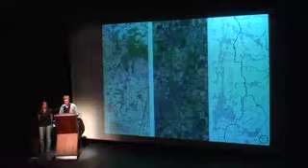So the question is, why is this water urbanism a hot topic today? It's been more or less forgotten for the past 2 centuries. Water was not considered in any urban theory, but now it's really becoming a hot topic.

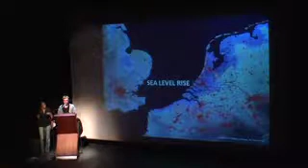And this because there are many challenges we are confronted with. The first one is related to climate change, which will lead to the rise of the sea level. So when we talk about sea level rise, we all have in mind the coast that might be affected, but actually in Flanders it's also the whole estuary of the Schelde. So this map in blue shows everything that is below 0 and 1.3 meters height. So according to some scenarios, that would be underwater within a certain future.

Another consequence of climate change is that the rainfall regime will change everywhere, but in Flanders it will lead to drier summers, wetter winters, and more intense extremes. It means that there will be more intense rainfalls in shorter periods of time.

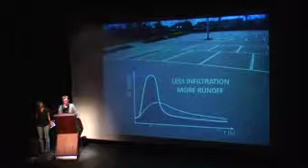So next to these natural factors, there's also the question of urbanization that is ongoing, and that leads to less infiltration and more runoff. It means that water can simply not infiltrate and goes more rapidly into the river. So this scheme is a kind of classic scheme in hydraulic science. The curve on the bottom is the normal reaction of a river in case of rain, and the one much more condensed is the reaction of a river if the environment is completely paved. It means that you have a peak flow, all water goes very rapidly into the river, and this is exactly what needs to be avoided and prevented.

And this topic of ongoing urbanization is also quite a hot topic, because Flanders is already now one of the most densely urbanized areas in the world, and for the next 15 years it will further increase. So in red you see predictions of where and how it will increase further.

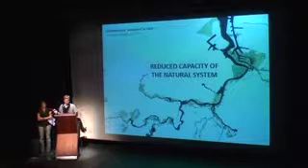Another factor is that the river system has been completely manipulated through time, and actually the capacity of the river system is completely reduced to a kind of minimum. This shows the winter bed of the Schelde estuary, so the maximum capacity between dikes of the Schelde, in comparison to the wetland at the time of Ferraris. So you see there, in a simple way, how the space for the water has been restricted. And this was a long-run process of the idea of controlling water, making it go away as fast as possible.

When you read all texts about these types of interventions they made, the idea was really, in case of storm, let's get rid of water as fast as possible. So rivers have been straightened, canalized, all meanders were cut off. This has been the logic for centuries and is now being a bit reconsidered.

So the result of all these factors is leading to what you see here. So a number of disasters which are happening more and more often, and also what is specific is that they are new disasters and that they are happening in unexpected places. So the water system appears more and more like very complex machinery that nobody really controls anymore.

So in reaction to this, there was a big effort to develop a new water management policy, and it could be considered as a small revolution. So in 2000, there was the European Water Framework Directive that is valid for the whole of Europe, and it was applied for Flanders into the Integraal Waterbeleid. So they're proposing lots of new ways to deal with water. But let's say that the two most important progresses are, first, that it takes as unit of water management no longer the administrative boundary of the municipality or a region, but really the physical boundary of the river system.

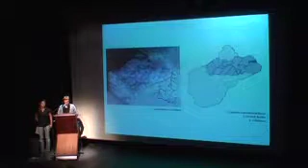So that was one major progress, and the other one is the shift from an end-of-pipe approach, where in the past we used to solve water problems in a very defensive way, like we protect this place, but we don't care about what happens downstream. So it is a totally new approach that now is much more preventive, saying let's keep water as much as possible where it is now.

So they defined and they are promoting what they call the three-step strategy. You can see here at the bottom. And it's the idea that you should at first make as much effort as possible to reuse, to let water infiltrate and retain it. And only once this is totally exploited, you can skip to the second strategy, which is storing excessive water. So once the water is in the river, to make sure it doesn't overflow, you can either make retention basins along the river or create some floodplains along the river.

And this is what they're actually doing now for the Sigma plan along the Schelde. They are recreating controlled floodplains, so kinds of pockets you see there with a new dike that can get flooded in case of high waters, and it keeps water for a moment and then goes back into the river. And then once these two first strategies are exploited, then you can drain water safely, make sure that the dikes are high enough, and if possible in a slow way. So if you can reconnect old meanders, it's better also.

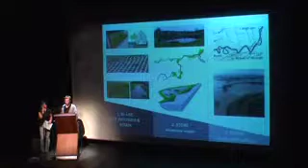So now we're gonna show the two case studies, and the word to Isabelle. So the first case study is the Gaverbeek in Harelbeke, Belgium. There are several strategies that you're going to recognize, but space for water and renaturalization is a main issue. So the Gaverbeek is located in the Leie Basin, and the motivation why I chose the case of the Gaverbeek Basin is because of this growing focus on retaining as much upstream. So it is an upstream area and non-navigable waterway.

And actually, so why do we do this? Because of this end-of-pipe solution that Christian was mentioning. In Ghent or in Bruges they are no more sustainable solutions, or are not seen as sustainable solutions. So that's why we go to the most upstream hydrological zone. And it talks about the smallest river in the river catchment, which is actually the first collector of rainfall, which could be seen as the first element that could be responsible for flooding downstream. So that is why we look at those.

These small rivers are today not really known by most of you, but the Gaverbeek Creek carries a lot of history and fame. The most known yearly event on this water course is the Waregem Koersen. It was and still is one of the known obstacles on the horse race track, as you can see here in some historical pictures. And further back in history, it was also the place where the Guldensporenslag took place. And today, for some of you soccer fans, it is the creek that lies next to the soccer stadium of Zulte Waregem. It runs also for more or less 8 kilometers under the E17 if you drive your car between Harelbeke and Waregem. So just to situate the creek.

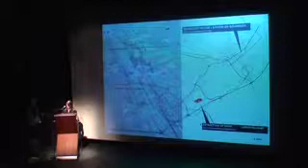And it was straightened, it was piped, even an extra exit pipe was put under Harelbeke to drain all the water as fast as possible to prevent flooding. So the decrease of the wetlands was caused by these landfills for the infrastructure. So the E17 was heightened up. Together with that came these big plots of industrial zones attached to it, also all landfilled. And of course big open spaces were also very attractive for new allotments.

So with less space for water, the challenge is now how to deal with the effects of climate change, or better, how to mitigate, how to soften these effects. So the recently flooded areas in red are caused now, today, by obstructions and sewer overflows. And the hydraulic devices, such as the sewers and dams, have reached their limits. Sewers cannot cope with it anymore. So with increased urbanization, the runoff will increase, and with climate change even more. So water needs more space.

So in this project, the challenge or the strategy is to renaturalize. So there were 3 landscapes identified on the basis of the scheme that Christian mentioned in the beginning: to retain water as much as possible in upstream areas, then to contain for reuse in the lower areas, where there are clay patches where you can store the water, and to drain, of course, where you need water resistance, or you can maybe adapt houses to be resilient, but you still need to drain a part.

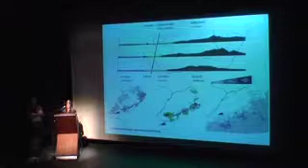So these 3 landscapes were characterized as part of a regional vision, and they were based on this water management principle. So the first area is the urbanized ladder edge, so between Harelbeke and Waregem there is to densify around the Steenwegen. Here the rainwater could be collected collectively around this road and brought to the lower wetland, where you then could de-densify the area.

In the second one, in the low wetlands, you could connect the meersen or marshes again in a chain, and the runoff of the infrastructure and industrial zones could be collected and purified in parallel basins that you see here, these lines. And the proposal here aims to integrate these water elements, infrastructure, and recreation in a kind of constructed wetland.

And then the third landscape is the diffuse edge, where water is retained upstream as much as possible, infiltrated through a remeandering of the course of these tributaries of the Gaverbeek. And here the urbanization is more spread, and you can see how these tributaries pass through, where they could again be uncovered and used in a renewed urban structure.

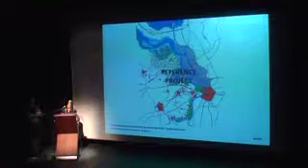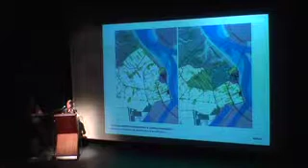So as a reference project to this strategy, I show Beveren, a project that OSA, our research group, made for a compensation area for the extension of the port. They also gave more space for water, and they defined 3 landscapes on a totally different scale, of course, than in our case study, but it's the same principle. It's about recognizing the renaturalization, the natural process of water in those areas, and defining a saltwater area, a brackish water area, and a sweetwater area. The urbanization is then restructured through densification and de-densification in relation to these 3 landscapes.

And this picture shows, for example, the former agricultural fields that are given back to nature in order to give space for water, and at the same time a new program emerges, recreation or a natural park. So the second issue, apart from the space for water, is a more urban issue, which is the creek village.

This example is situated in Vichte, one of the creek villages that I mentioned earlier, where remeandering and retaining water was the case. It's located on the creek, the Kasselrijbeek, and it is particular because of how these villages were settled. The origin was at a street that crossed the water, so they were located in this indigenous landscape with the castle and its moat, and then the farms situated next to the creek. And today this indigenous landscape has gone completely and been covered. Several big box storages came, so actually it transformed into a backyard.

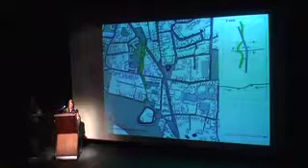So what I did in this project is to uncover and actually open up again, make a new civic axis for this village that just had this grey road, which was a big commercial road, and therefore serve as a parallel that could be much slower traffic, could at the same time accommodate water in the village and activate public spaces. So these two axes could then be overlaid with a network of slow water paths, and these slow water paths could retain rainfall inside the smaller public spaces and slow down the runoff as much as possible.

So the proposal is to add water in the village by accommodating it, for example, on a public square, giving it the opportunity to swell when bigger rainfalls happen, to activate these public spaces, and I will now demonstrate with a few reference projects what I mean. This is in Bordeaux. This is Cœur de la Bastide, an eco-quartier, they call it, by Dominique Perrault. They define the place by making a water garden. They define that this development is located inside a floodplain near the Garonne.

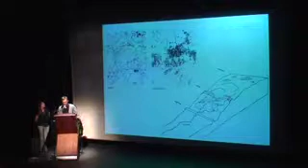So Turnhout is basically developed between two rivers. You can see it in this perspective on the right side. It was in the Kempen, a kind of desert-like, maybe not the right word in English, but nothing was growing there. It's very sandy, so it was like an oasis between two rivers. And then it later urbanized with the arrival of an irrigation canal and a highway.

So as I said, there are water issues in Turnhout. Actually two. One is that there are increasingly frequent floods happening downstream along the river, the Aa river. And the second one is within the city: they are confronted with the almost saturation of the sewer system. Both of these issues are related to the fact that Turnhout has been urbanizing extensively, especially since the highway was there, and is about to increase even further. For the next 15 years, it will increase by 15% more. So this paving is causing runoff and more water at once in the river, as explained before.

So the city had just defined the plan to split the sewer system, which is on the left side and is now collecting wastewater as well as rainwater, between sewer and rainwater. That's what we call decoupling. It means that the existing sewer network will be exclusively dedicated to wastewater, and on the right side they will have to develop a new stormwater collecting system. What interests us is not so much the sewer, but rather the new stormwater system, to measure what would be its spatial impact.

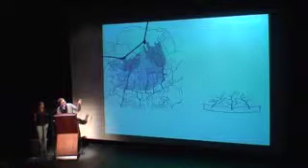So the topography of the city is such that the streets look like a river, where you have a main one that collects all water at the lowest point, and then tributaries connected to it. So it means also that each of these sub-systems has a catchment, has a paved area related to it. And so it gives a new picture of the city. Somehow we look at the street pattern not anymore as a mobility device, but as if it was a river system.

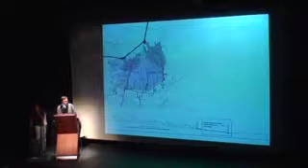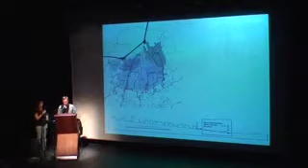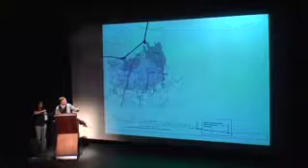And there's also a technical issue, which is that you cannot evacuate water as you want in the river. So at the bottom, the blue squares represent the buffer capacity needed to buffer water coming from the city before it enters the river, because there are limits of, actually it's liters per second per hectare covered, that you cannot go over. And so based on this is the plan they have.

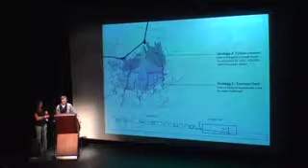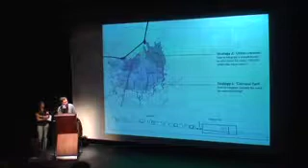We defined two strategies, because they want to do it, but they don't really know how to implement it, or how it will look, and how it could be used as an instrument for something else. So one strategy would be how to implement spatially these buffers they need at the threshold to the river. And another strategy is looking more upstream within the city, if there are any possibilities to create extra retention and infiltration devices that could either complement the collecting system or be an alternative to it, instead of having a piped system, to have something that remains above ground.

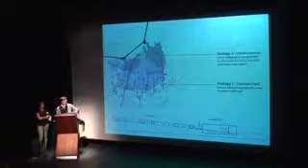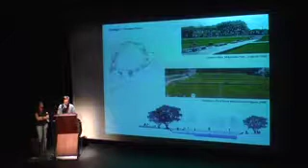So the first strategy is simply looking at where these buffers are needed and confronting it to unbuilt spaces. And what is nice about it is that, due to the fact that the city is surrounded by two rivers, it draws a kind of green belt around the city that could become a system of parks, or a system of recreational activities. So here there are some nice examples of buffers that are at the same time parks, or things like that.

And the other strategy is, as I said, to look within the city, where there is a possibility to retain water. And the name for it would be urban vennen, and vennen refers to what you see on the picture there. These are typically Campine features. So these are very shallow lakes that also have a varying level of water. Actually, it's in depressed areas, water gets there and gets evaporated. So it's more like a concept of how to use this principle of vennen within the city.

So the first thing to look at is all the potentially permeable zones within the fabric. That gives the map on the left side of the permeable city. And we could add to it all the post-industrial sites that can be seen, in the short or mid-term future, as places for reconversion, where we could also implement some retention zones. And then on the bottom, more practically, look at what belongs to the city, because it would be easier to implement something on public-owned land, and look at the planned projects if there is any contradiction with what we discussed above.

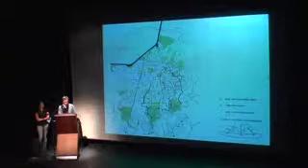So this gives the picture of what we selected as potential retention zones and infiltration zones. They need to be big enough also. Overlapping with the streets as river system, it helps to see which of all the vennen, so all these empty spaces, are the most strategically located with regard to water, which are those that could collect water because of the topography.

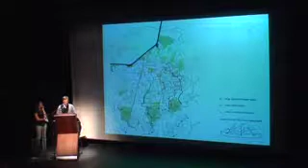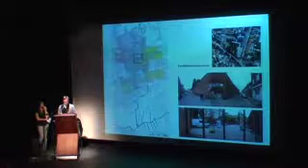So to make it more clear, we zoom on one of these sub-catchments, and actually there are three interesting places in that sub-catchment. These are the three blue things you see on the left side. I will just go through it rapidly, but here in that case it's the front yard of a school that is now a kind of mix of parking and playground, but it's really at the meeting of two collecting streets, so this could become at the same time a qualitative public space, and collect water and let it infiltrate. These are just images of what a small-scale retention facility could look like.

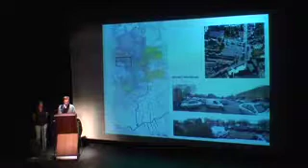Another place is the parking in front of the famous museum of the playing card. That is very informal, and here also it's at the confluence of streets as rivers. And here, as a reference, I showed to the people from the city a parking made by Agence Terre near Marseille, where the parking place is structured by a number of swales that collect water.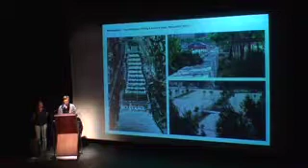So in the meantime, it has some landscape quality and a hydraulic function. And the last one here is a playground in the southern part, where there are also examples that were made before. And the reaction of the people of the city when I showed this was that they were afraid about security and how to keep the place clean. If you accumulate water, you will get mud, etc.

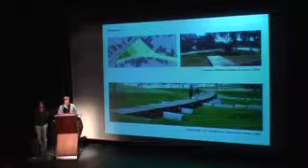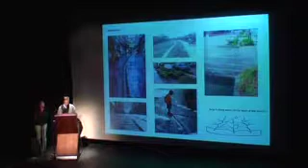So these were examples of suspended platforms above very permeable surfaces. So it's not really a problem if the grass gets a bit dirty. So it's just this distinction of surfaces that could be an answer. And then another issue for this project is how to keep water at the level of the street. I will not go too much into detail, but it shows some possibilities.

So as a conclusion for this case, our goal is not what I've shown here, a number of places that could look nicer. Of course, that's not our goal as urban designers. It's more to see how the sum of all these small interventions could become a network, could be part of a system within the city. So, for instance, a system of open spaces or parks, and then later this system of open spaces could also determine further densification.

The first remark is to see how striking it is that a city that has very little water will be affected by the new water management approach, where you are obliged to retain and store water. So this shows how important the spatial impact will be. I will go rapidly, because I'm a bit frustrated when I show this, because it's work in progress, and we didn't go much further than this.

So I will just show another example that is related, but not really. It's also an issue of water retention, and in what way it could be used for urban restructuring. It focuses on the region of Le Centre in Wallonie, which is known for its mining past. So in red you see all the terrils, which are the remaining hills of waste material that they excavated. And the region is actually confronted with problems of subsidence.

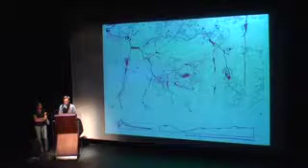And so we did the exercise with the students, and they focused on Anderlues, one of these villages that was initially structured along a river and then got further developed with industrialization. If you see the section above, there was a terril put in the middle of the valley. So now the village is really surrounding a huge terril, and the activity has completely ceased. So the question is what to do with this abandoned terril, with this village which has no real future until now.

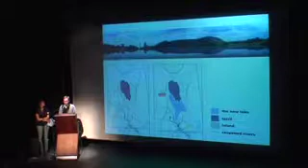And when you look a bit south of the terril, you also have this confluence of many rivers, and there are some retention facilities, but very technical. And so the proposal the students made was a bit radical: to inundate the whole plain using the terril as a kind of barrier, as a kind of dam. And so this terril, which was at the center but didn't work anymore, could become again the central core of the village. And they made an extrapolation of how this new waterfront could become the place for new developments.

And they made a reference here where the terril actually becomes a black island, and in a way it emphasizes the artificiality, which makes it beautiful. So this goes to the conclusion.

So we've come to the end of our presentation, and I would like to summarize what we've been showing you. Of course, each chapter was only a small abstraction of the complicated interdisciplinary work we've been conducting between the hydraulic engineers and us as urbanists. In the challenges chapter, we've talked about climate change, flooding, climate change scenarios. It's all very technical, but I want to assure you that we're not trying to become hydrologists. We are interpreting the hydrological engineers in our urbanism language, and we hope that this conversation also works vice versa.

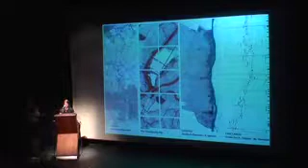I also would like to mention that what we do is part of a bigger research group, the OSA research group. For example, we have some cases in Vietnam. Tuan is working on Hanoi. Annelies will be working for Belspo also on Vietnamese cities. Our postgraduate center is also conducting some studios that have been working on Kanto this semester and the Erie Canal. And all of this work sometimes gets published, as happened 2 years ago when the conference on water and urban development paradigms took place.